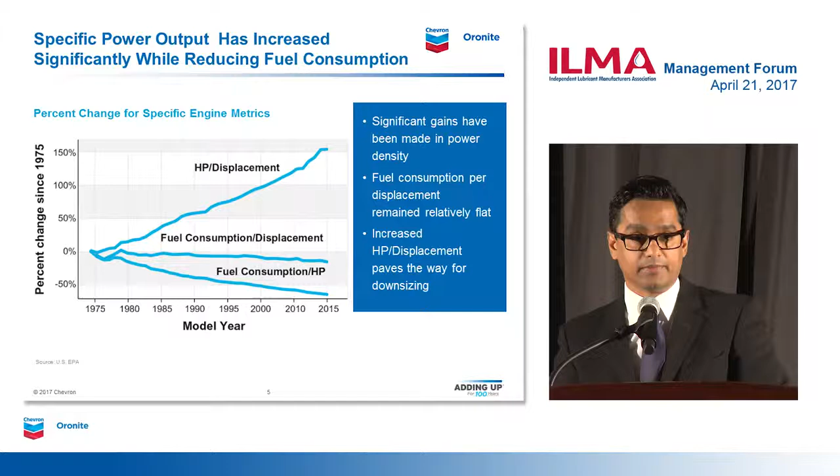There was a significant drop in average engine displacement in the late 1970s through the early 1980s, as we started to move away from a market dominated by large V8 engines. This was a big step towards downsizing, but then the trend stopped for the next 35 years.

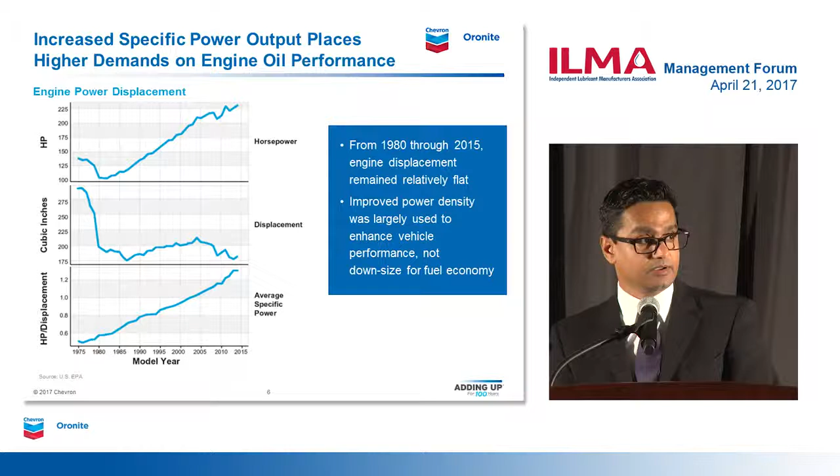Even with advances in power density since 1980, engine displacement remained largely flat through almost 2015, and actually increased some during the mid-2000s. Gains in power per displacement were largely targeted at improving vehicle performance, not necessarily fuel economy. That's not to say OEMs were at fault—it was simply meeting the demands of the marketplace. Today, vehicle manufacturers are starting to leverage the gains in power density by downsizing engines to specifically improve fuel economy.

So if you look at this chart, why the sudden interest in fuel economy? First, fuel economy is directly correlated to carbon dioxide and emissions, which we all know about, called greenhouse gases. Secondly, if you look at the United States, it currently lags other countries in fuel economy.

Fuel taxes are relatively low in the US, which does not encourage consumers to buy more fuel-efficient vehicles. Corporate average fuel economy regulations are now aimed at forcing OEMs to produce more fuel-efficient vehicles, even though the natural market demand may not be there with relatively low prices for the current environment.

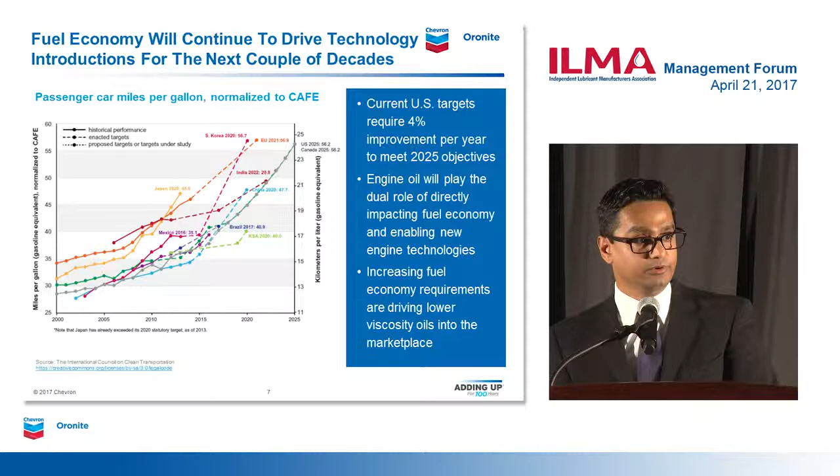So in order to meet these targets, which is 56.2 miles per gallon by 2025, the OEMs needed to improve corporate average fuel economy by 4% per year from now through 2025. The target gets progressively more difficult as the low-hanging fruit is captured and more sophisticated technologies and expensive equipment are adopted. However, I'm sure these numbers will be further reviewed with the current administration taking place.

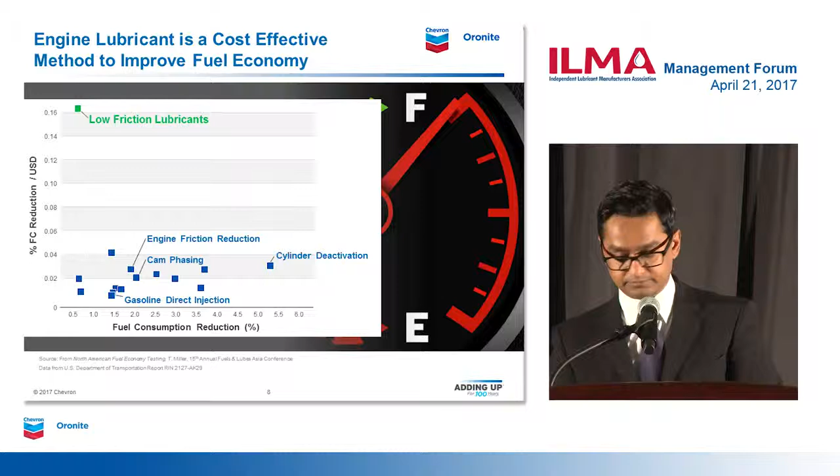So when you look at fuel economy, there are various ways in which fuel economy requirements drive new technologies into the marketplace. One of the first considerations is which conditions should be used to measure fuel economy, and are those conditions really representative of the market? So you have drive cycles, friction reduction, combustion optimization, downsizing, downspeeding. These are some of the examples.

Changes in what I'm calling the operating environment have an impact on the engine technology, which then has an impact on the oil formulations. Some of these relationships are not always obvious or even predicted. LSPI is an example we'll be discussing a little bit.

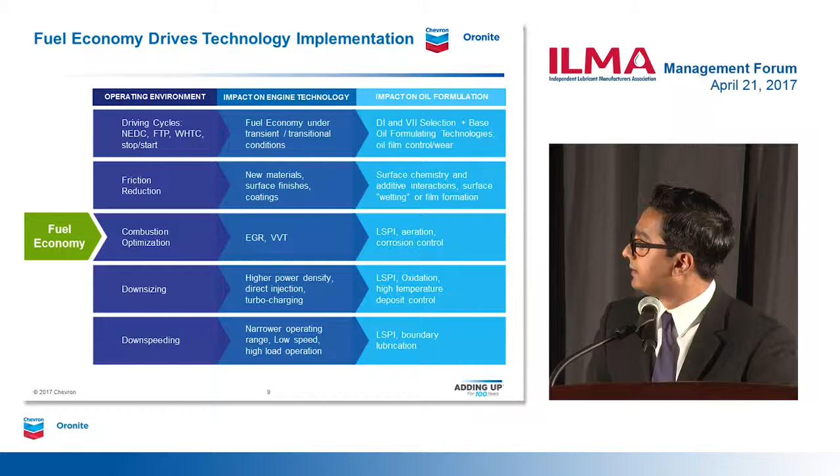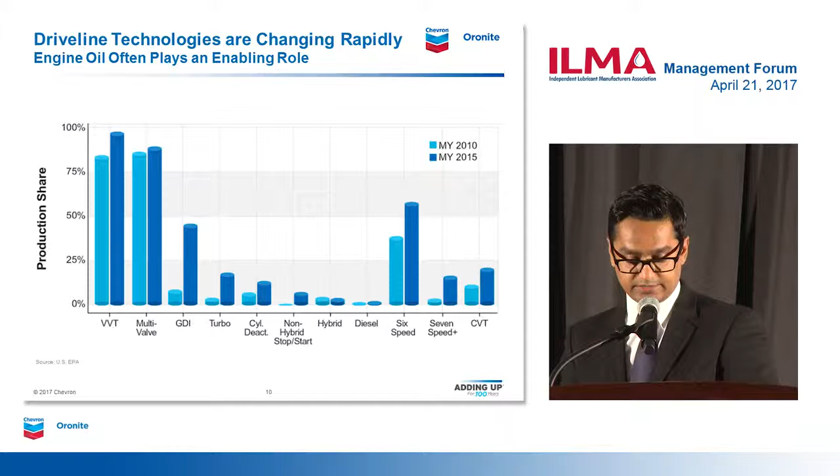So if you now take a look at the penetration of many of these technologies highlighted on the previous chart, we see OEMs are using various means to improve fuel economy. Of course, those with the highest penetration were in many cases the easiest and most cost-effective, what we call low-hanging fruit. Virtually all of these technologies shown have a direct or indirect impact on the engine oil. Changes in the engine oil have been required to enable many of these technologies. Let's now take a closer look at some of them.

Specifically, in order to provide optimal fuel economy performance, many OEMs are offering turbocharged GDI engines coupled with 6, 7, 8, even 9-speed transmissions or even CVT. We see a rapid growth of products incorporating these technologies in the marketplace, and in order to enable some of these technologies, the passenger car motor oil must provide protection against LSPI, which is low-speed pre-ignition, oxidation deposits, soot or particulate matter, which we have never dealt with before on the gasoline side.

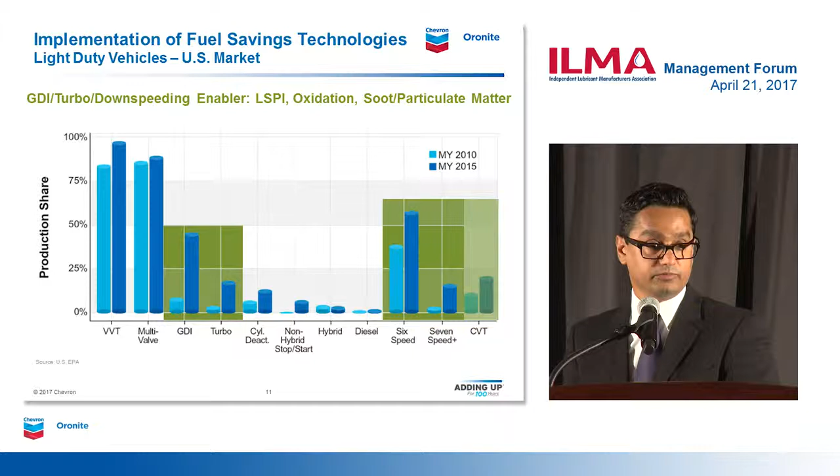So when you look at the combination of GDI and turbo, that allows the engine to generate high levels of power at relatively slow operating speeds. A relatively new phenomenon was discovered when operating turbo GDI engines under these conditions, which is low-speed pre-ignition, or LSPI. And that certainly has some catastrophic impacts if not treated appropriately.

There has been a fair amount of work recently on LSPI, and there are various theories out there regarding the mechanism. In many of the studies, the engine oil composition has been having an impact on LSPI, and an LSPI test is being developed as part of the next categories, including GF-6 and Dexos, to address some of these. In addition, many OEMs around the world are developing their own LSPI test, which is now becoming more of a global phenomenon as this technology penetrates the marketplace.

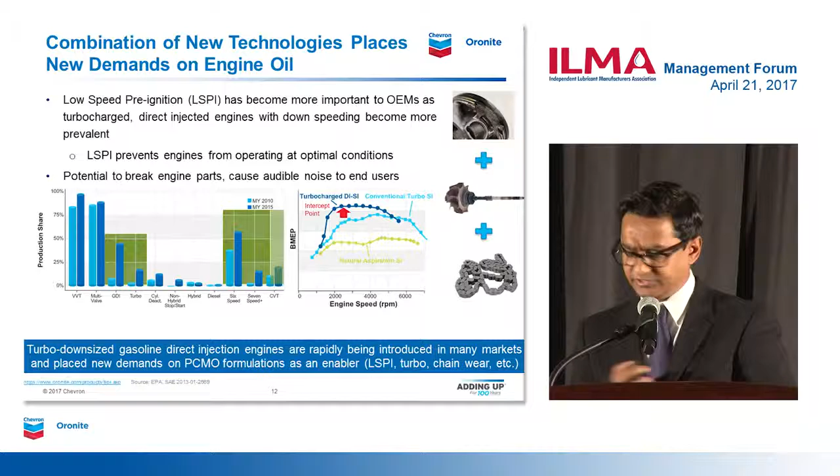So let's take a little bit of a deeper look into the technical aspects of what LSPI is. LSPI results in the formation of a new flame front due to an unknown initiator that leads to knocking, which we all know from a traditional knocking perspective is not good for the engine.

Besides making an audible noise, which is detectable by vehicle operators and will not make them pass through NVH testing, LSPI can result in pressure spikes up to 130 bar. Passenger car gasoline engines are not designed, the metallurgy is not designed to operate at those pressures, and engines will be damaged if we hit them with such high peak pressures.

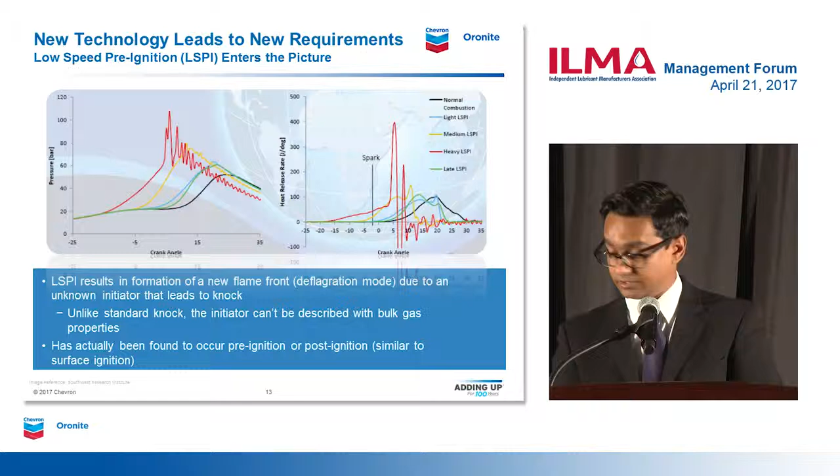What you saw in the previous slide is an image or illustration of a broken piston. So as OEMs make those developments, we are evaluating these aspects of LSPI to fully understand the impact of fuels, impact of lubricants, impact of operating conditions, trying to make sure we can take care of this challenge or performance.

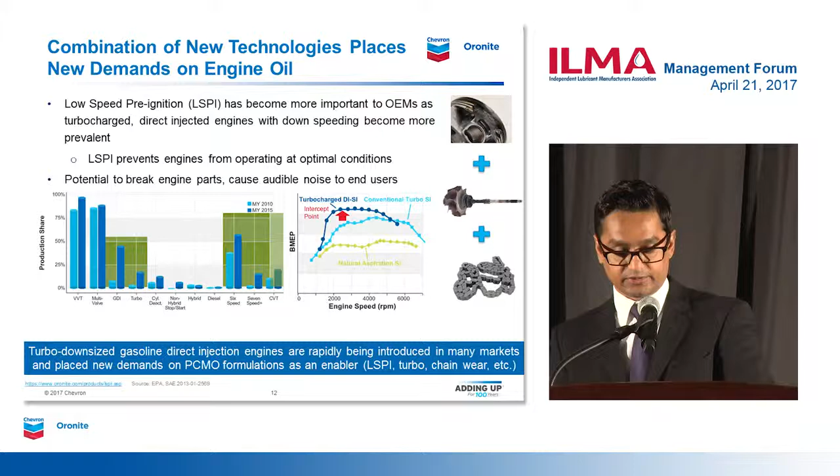As mentioned, various studies have taken place to investigate the impact of fuel, lubricant, hardware, etc. on LSPI. But there are specifically certain lubricant components, as we've heard from multiple literature sources and work that has been done, that are known to promote LSPI, while others can neutralize or actually suppress LSPI. However, many of these compounds are included in engine oil formulations and have been used to deliver the traditional performance of fuel economy, cleanliness, and durability. They can't simply be removed without affecting other areas of performance.

So in order to formulate the future engine oil technologies while addressing LSPI, a rebalance of the chemistries of the compounds is needed to provide the needed performance in all areas, not just LSPI.

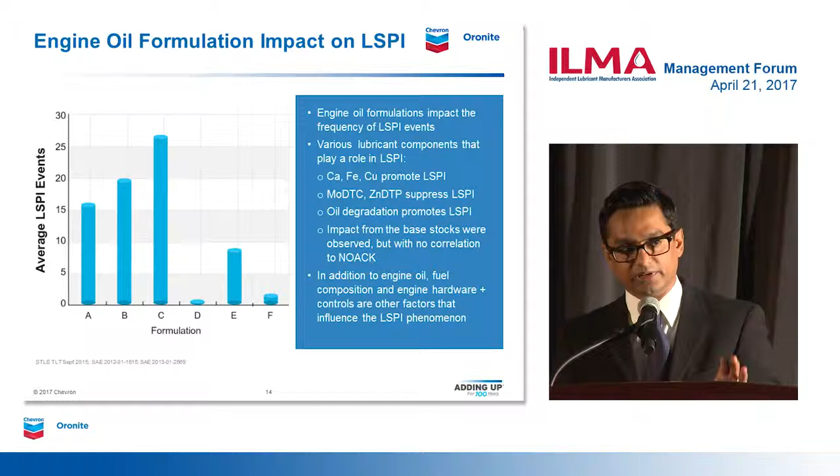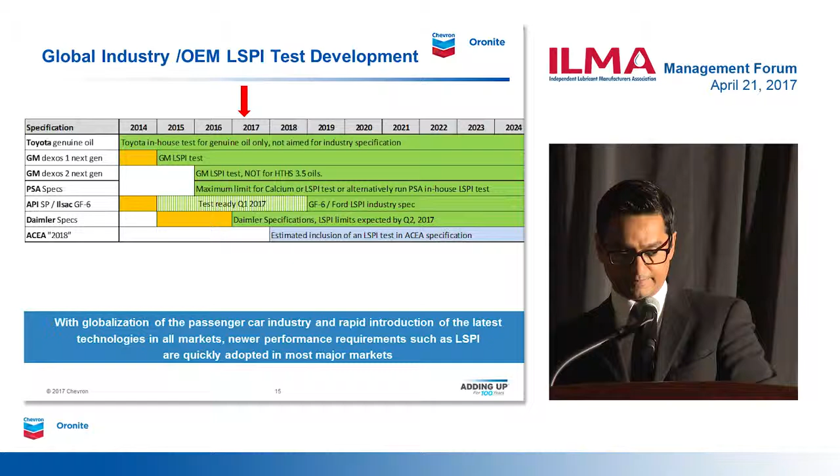Another relatively new phenomena we are seeing with direct injection: passenger car engine oils now need to deal with soot or particulate matter, which is probably the first time we're dealing with this. Soot or particulate matter in the oil has historically been limited to diesel engines, which also inject fuel directly into the combustion chamber. As a result of GDI, passenger car oils now must be able to provide wear control with the soot or particulate matter in the oil.

As a part of the ILSAC GF-6 category, Ford is developing a timing chain wear test with the industry using a 2.0-liter turbocharged GDI engine. The test uses silent chain material and will measure percent chain or timing chain stretch, which is a function of wear between the link pin and the plate.

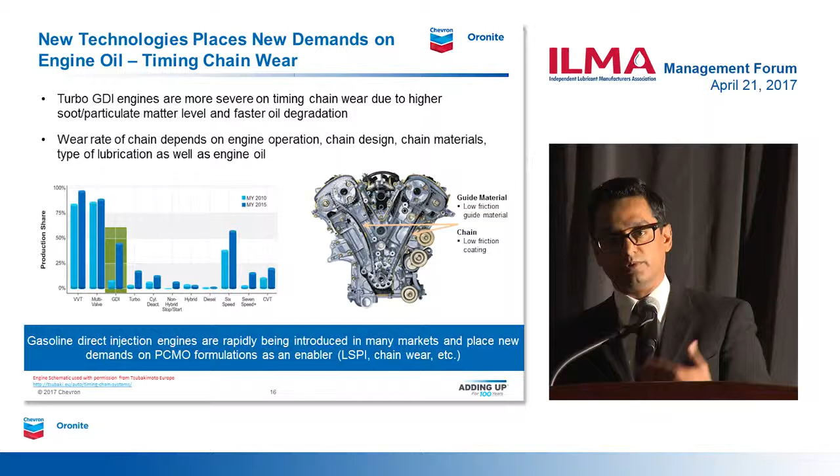There's been a lot of work done in the past five years, a lot of in-house work done by multiple OEMs and multiple folks in the industry. Traditionally, a chain wear test has responded to the materials and the metallurgy. But in this case, it's the first time we're trying to bring in a chain wear test through an engine to measure oil performance.

So with this in mind, with the trends and the drivers and the hardware that is in the marketplace, how do we address it? How do we bring it to this industry? How do we develop a specification and then cater to the performance needs? Specifically for today, we'll focus on GF-6 and Dexos because those are the two big volume key specifications that are hitting the marketplace pretty soon.

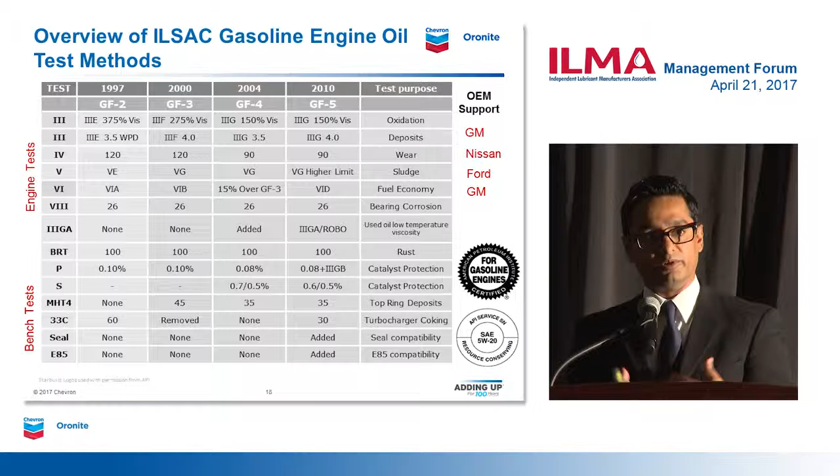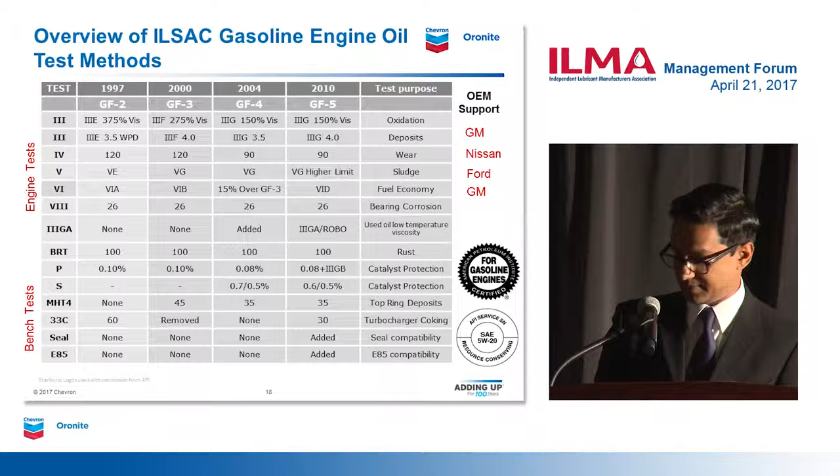There's a lot of things that happen in these couple of lines I just said. There's a lot of industry bodies, a lot of partnership that happens, coming together to develop a spec that would take care of the OEM's needs or the hardware needs. So going forward, can we use the same infrastructure to address the next set of challenges, which is coming up with GF-6?

So what to expect? Fuel economy and oil robustness are always the key drivers, either directly or indirectly. In this case, fuel economy will be the key driver for moving to GF-6. Measured fuel economy benefit will be through updates to the new tests, Sequence 6E and Sequence 6F, which will include fresh and used oil requirements. GF-6 oils will certainly have an indirect impact to fuel economy by minimizing LSPI, allowing for an indirect fuel economy benefit through the introduction of GF-6 technology.

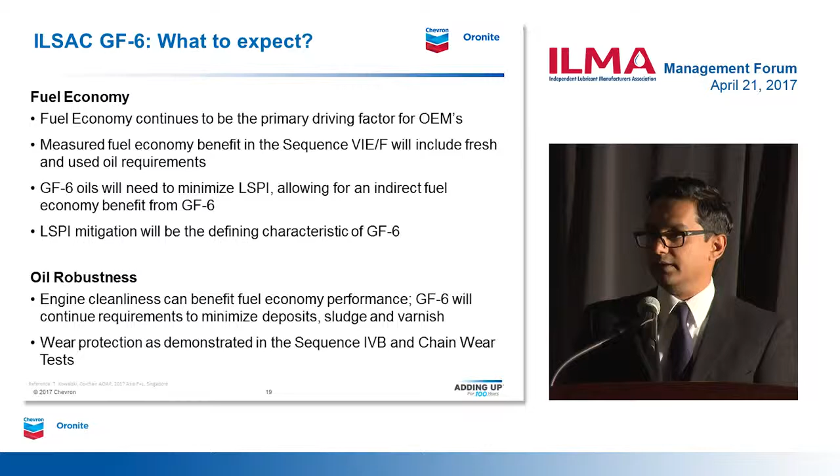At the same time, durability by providing some form of LSPI mitigation will be the primary defining characteristic of GF-6. So it's kind of the gateway to GF-6. And after you are in there, it's basically the traditional performance, that is oil robustness, the cleanliness, the hardware protection, and sludge performance.

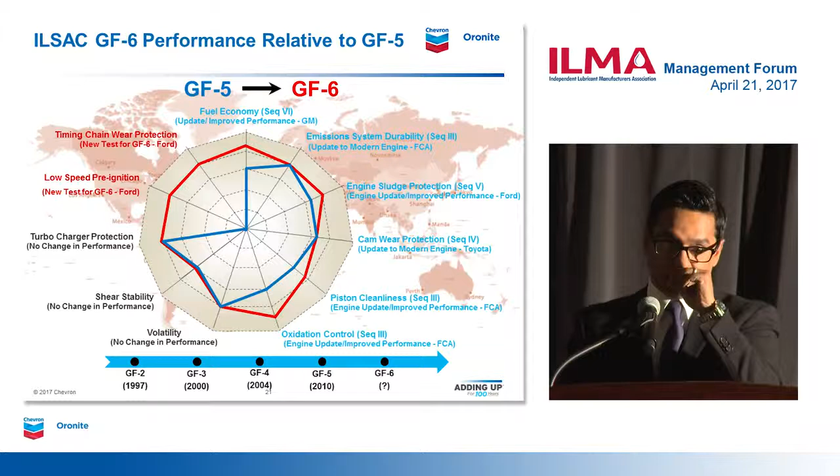So here's a quick snapshot of the high-level qualitative comparison of GF-5 performance to GF-6. What you see on the slide is a quick illustration of the GF-5 performance. And when I look at GF-6, what I want to illustrate here is probably in the history of passenger car motor oil development, the amount of work going on in bringing GF-6 online is tremendous.

If you look at the blue performance parameters, which is a traditional performance parameter getting updated by hardware, whether it's fuel economy, engine sludge protection, cam wear protection, or piston cleanliness and oxidation control, every single test is getting upgraded with new hardware, either from the same OEM or a different OEM.

At the same time, there are two brand new OEMs coming and contributing to this development, which is Chrysler and Toyota. At the same time, we're also bringing in two new tests, timing chain wear protection and low-speed pre-ignition, which has never been there before. So if you count pretty much the number of tests that the industry is bringing online with GF-6, it almost accounts to seven.

I don't think in the past, to my recollection, and I haven't been there for all of these developments, any of these GF updates have gone through that kind of development. So I just wanted to level set the amount of work the industry is going through in bringing some of these specifications online to update the hardware needs.

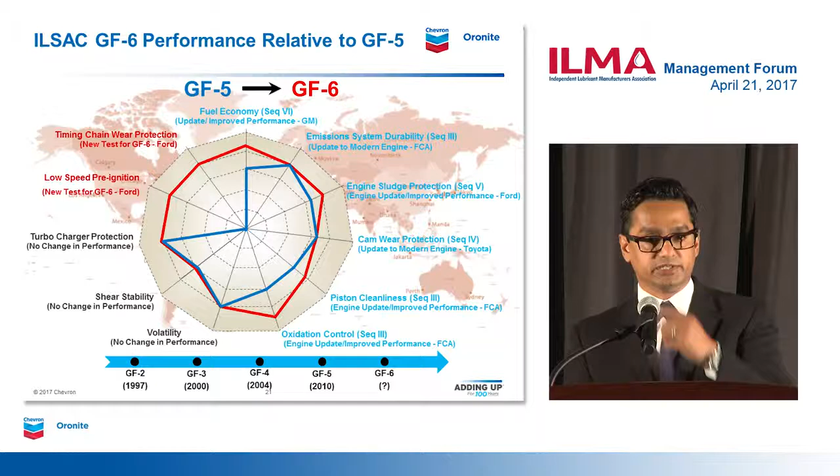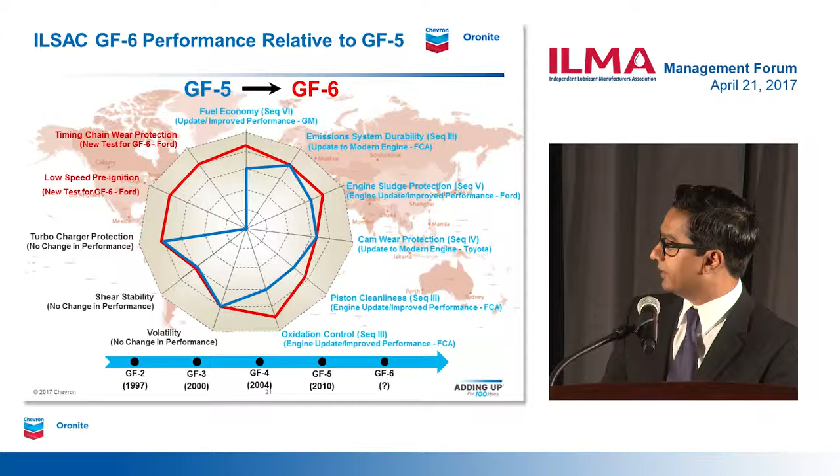And plus, what you see here is the global nature, the global footprint, with requirements not only in Americas, but now there is an emerging requirement at the same time in Asia, which is adopting these GF-6 categories at the same time and implementing it at the same time as in Americas. So there is a lot of challenge in front of us that the industry is coming together to develop.

So where are we? What is the road to GF-6? Here we are today, engine test development. I'm sure you have read a lot of articles and literature, and been exposed to a lot of dates from an API first license date perspective, and I always come to, even within my own management, they ask, when is GF-6? As a matter of fact, last year, we collectively as a team in AOAP decided not to throw out a first license date, because unless we complete and get some ground running on the engine test development, it doesn't make sense for us to project something, because it gives a false notion of delays.

I think what people need to understand is the amount of work that is going on in bringing some of these categories online. So engine test development is where we stand. This is probably the simplest picture of GF-6 development, and I'll show you the more complicated one next. But we are coming to an end of engine test development. The light is probably coming, we can see the light at the end of the tunnel. But even after that, there's a lot more work that needs to be done.

BOI VGRA is another big piece of it, because when you bring in seven new tests, you bring in a lot of BOI VGRA development work. I know some of our folks here are pretty involved in some of this development, and this will take, we don't know how long, but it will take a lot of time to develop the BOI VGRA rules as we develop the products.

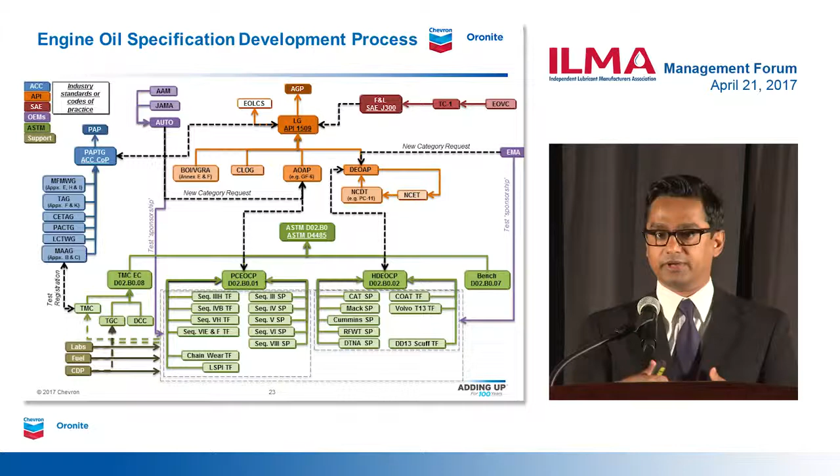Let's look at how the Americas market is breaking up. The Americas market is now breaking into Dexos. Dexos is now into generation 2. When we were in generation 1 and GF-5, they kind of overlapped at the same time. In the case of generation 2 and GF-6, now there is a gap. So generation 2 is right in front of us, but GF-6 is a couple of years from now.

The implementation is not lagging, it's a global implementation. So their expectations to launch some of these products are at the same time, and the changes are at the same time. So, a quick reminder: Dexos 1 first generation licenses are scheduled to expire on August 31st, 2017, which is right in a couple of months. I'm sure there's a lot of dialogue going on in the industry about how to address that and how the products need to be updated.

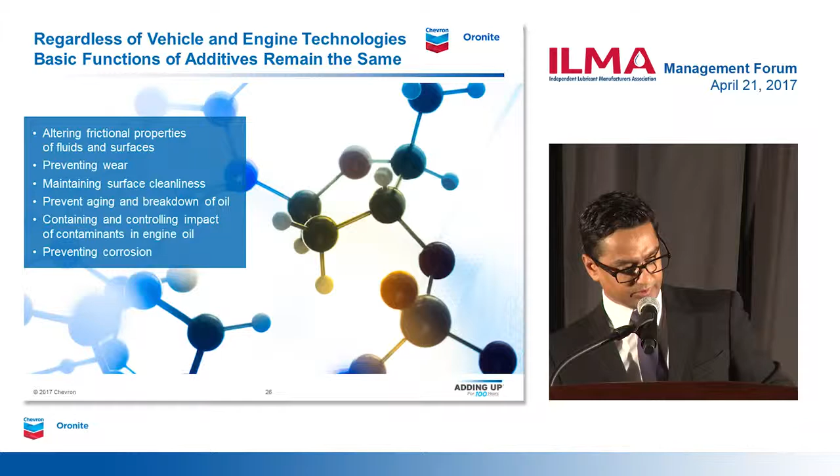Let's step back and look at the hardware. We're all a bunch of engineers, chemists, and scientists coming together to develop technology. One of the first things we look at is trying to break down the problem and simplify it. One aspect to always keep in mind is that regardless of what the vehicle engine hardware is, let's boil it down to a system, or technologies we need to develop to address that system or operational environment, and how the basic function of oil additives is impacted, because that's where we need to focus, since we need to know what chemistries we need to develop for the future.

This is a very fundamental, simplistic way to help us develop products or technologies. But eventually I always come down to this holy grail of engine oil development: the classic balance of fuel economy and durability. That's the classic balance, and it's not going away. It's just coming in different shapes and forms, but that's the classic balance we always have to take care of.

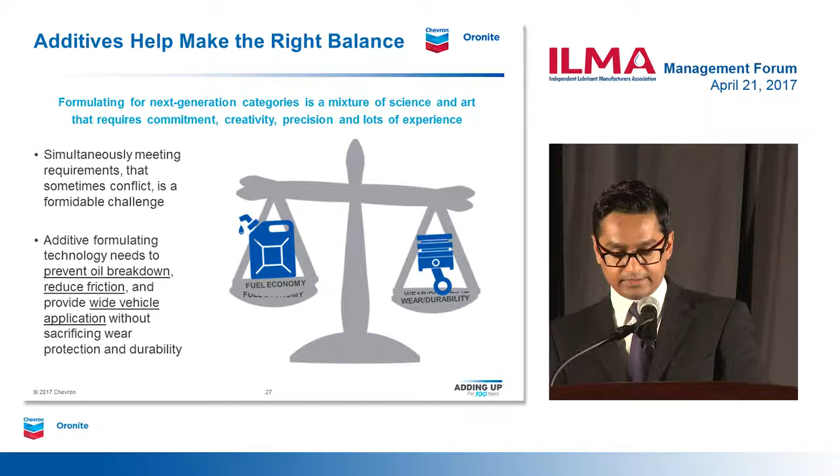There are many ways an engine oil could be formulated to improve fuel economy if that's the only concern. However, as we'll discuss a little later, fuel economy is just one piece of the puzzle. Additives have to help find the right balance. The formulating technologies need to provide wear and friction reduction, universal oil capability without sacrificing wear protection and durability, while simultaneously meeting some of the future challenges and being able to connect to those.

We have all done puzzles. My 4-year-old gets better at solving puzzles as she grows up. But I think the biggest challenge for us is taking care of these smaller systems and then fitting them into the bigger puzzle. And that's a big piece of it.

So when I say a smaller system, right now the system in front of us is the turbocharged GDI engine. The performance areas we have to address are turbo protection, low-speed pre-ignition, and chain wear, to name a few. However, when we solve this puzzle, it has to fit into the traditional puzzle, which takes care of fuel economy, wear, and sludge. And then we also have to be ready for the future, because sometimes we want that flexibility on the platform.

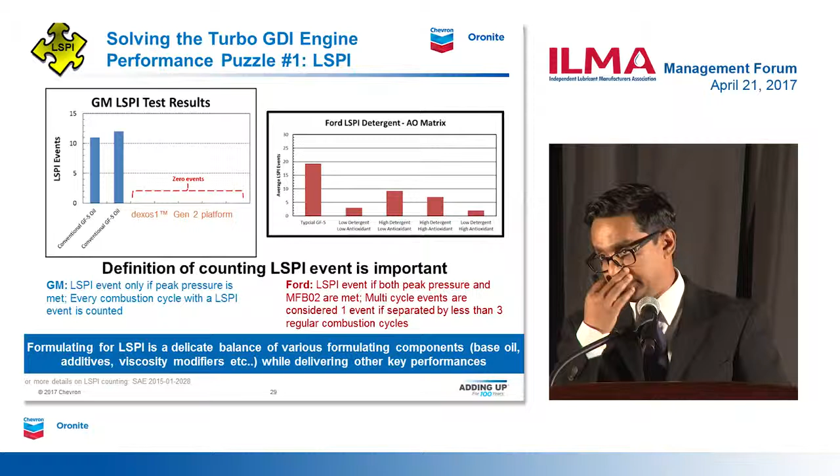So how are we doing that? LSPI is the first one. What you see on this slide are 2 different tests, 2 different chemistries, trying to understand and simulate how to handle multiple different LSPI tests. Because as I showed in the earlier slides, there are multiple OEMs coming up either with their own tests or developing them as part of the specification. But sometimes, from a simplistic view, to reduce complexity, we want to minimize and understand the fundamentals. So what you see here on the left-hand side is a GM LSPI test.

If you put a conventional GF-5 oil, you see high LSPI events, which is not acceptable. When you look at a Dexos 1 Gen 2 type platform, this is the requirement. You have to meet the GM Dexos 1 Gen 2 limits, which requires you to have at least 3 zeros in the test, and also a maximum peak pressure of 2 events, not more than that.

However, what we are trying to illustrate here is as we move into the Ford engine, these same oils could actually behave a little bit differently. Here is a small snapshot of a matrix of a detergent and an antioxidant, just to show what are the drivers for us to formulate around.

But the key part to these two tests is the definition of the counting of LSPI events, which is extremely important because when we develop specification after the technology, it is extremely important to know how the limits will be drawn. And so when you're looking at a GM test, you might see all zeros, and you might see some events here, but that doesn't mean that they are looking at the same thing.

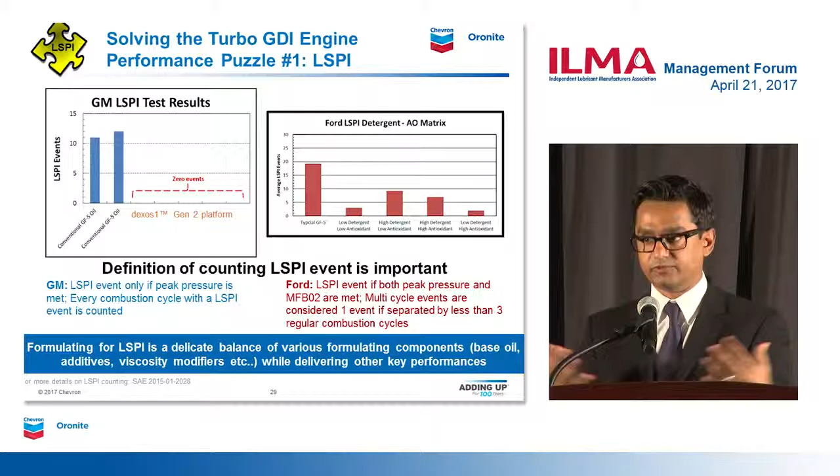So those are the things that the OEMs need to understand, that they cannot have, that the industry cannot develop single products for every single engine or LSPI test. It has to fit in. So we wrote a paper just to explain that process of how we need to understand the mechanism of counting as we go into the limit setting process.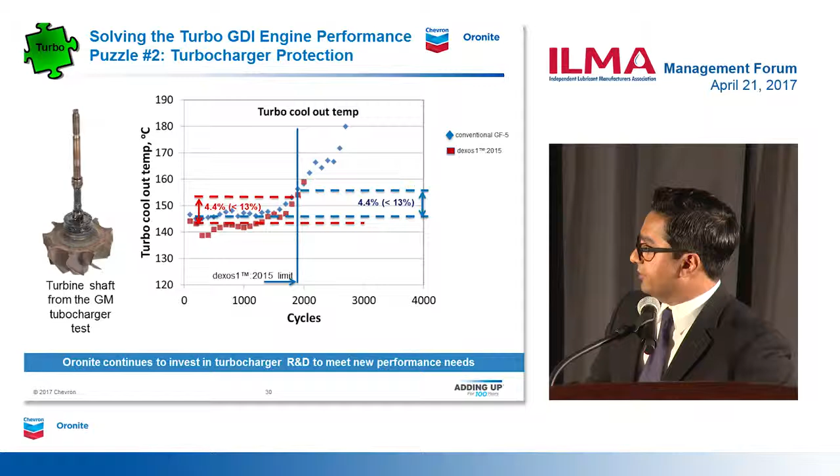So eventually, what this test is looking at is the antioxidancy performance or the oxidation strength of the oil. So you have to take care of the LSPI and make sure once you reformulate the product to address LSPI, you can deliver the antioxidancy performance to take care of turbocharger protection. And these are the limits: less than 13% for the Dexos 1 Gen 2 approval.

And finally, in the turbocharged GDI engine equation, you have the chain wear. Although the test has completed the precision matrix, there is still some work going on, post-precision matrix, to fine-tune the test. But what you see here is the cross-section of what exactly we're measuring. We're trying to measure the wear between the pin and the plate.

However, it's extremely complex to put down a fundamental tribological system in place to measure this wear and develop a specification. So indirectly, what we are measuring is a timing chain stretch, which is a function of the wear that we see in this contact.

And what you see here are two reference oils that are being used in the industry. One is the high reference oil, and another one is the low reference oil. The idea here is, again, once you formulate to achieve a certain number, which is low reference oil, for example, if I take this one as a passing or a good oil going forward in GF-6, you have to make sure whatever changes you make to this chemistry, you are now able to address all of the other GF-6 tests accordingly. And there's been a lot of work, as I said, done in this area.

There's a lot of papers around understanding the soot size, the differences in the soot particles between diesel and gasoline. Traditionally, this test, as I said, has always responded to metallurgy differences. You put a coating here, you can drop the numbers. There hasn't been a test where it can statistically separate oils, and this probably would be the first one.

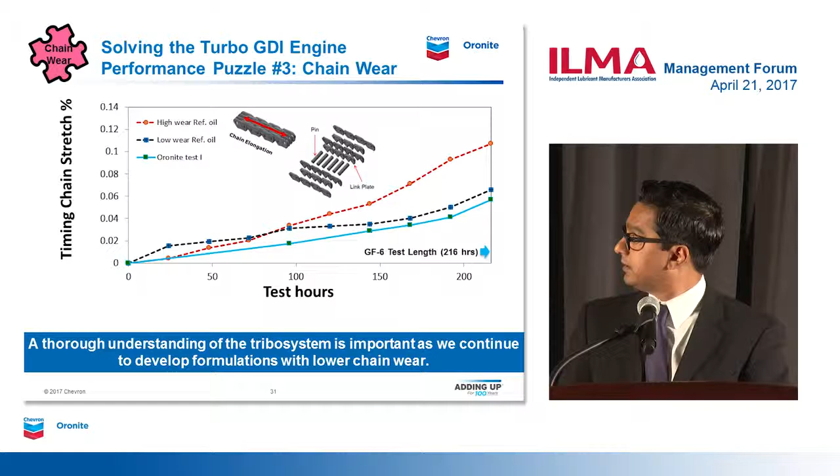So to sum it up, how are we going to deliver this performance? As I said, the traditional areas is enabling fuel economy directly, indirectly through viscosity changes, through additives, friction modifiers, low friction lubricants, enabling hardware indirectly like LSPI. But after that, it comes down to engine protection, delivering engine cleanliness and durability.

However, after performance, we got to make sure that we address the supply chain aspect of it. We have to make sure that the product is available globally. And I guess a lot of folks are interested - at the end of the day, it has to be cost effective. It has to meet the market economics, right? So that's another piece of the puzzle that we'll have to address.

Plus, as I said, products are becoming more global, and that needs to be addressed. So the complexity is not just limited to the technical development, it also is part of how to bring a product to the marketplace. So technical products and the marketplace is extremely important to keep in mind as you take a holistic view of the development process.

So here are some performance profiles, just to give you a summary of the performance profiles of products that we probably need to think of as we address the turbo GDI performance. So here we are with GF-5. I've just listed out the key performance areas. We're all familiar with it.

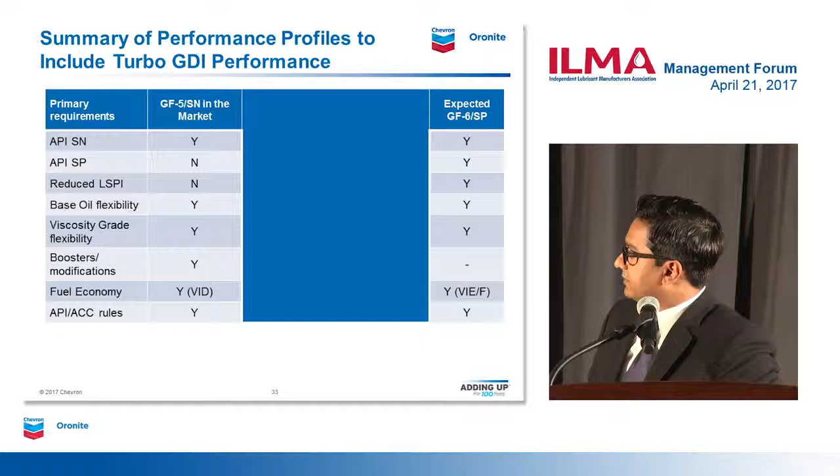This is what the expected GF-6, and these are conventional products. But again, how do we jump there? We're not yet here, we're getting there. Dexos 1 came in, so we are addressing LSPI capability there, reduced LSPI.

As you have seen, GM Dexos is very limited in terms of the flexibility around BOI VGRA. So there is a limited set of products in the marketplace. There is a lot of work that is going on with GM and the industry to bring products. There's a limited viscosity profile that they're looking for because a lot of these engines are looking at 5W-30, 0W-20. There is a 5W-20, and there is a little bit of 0W-30, and they've also introduced 0W-16, although they have explicitly said in a lot of their presentations that none of their engines right now uses 0W-16. But again, I think the concept that they use is future-proofing the specification if there is a need in the future.

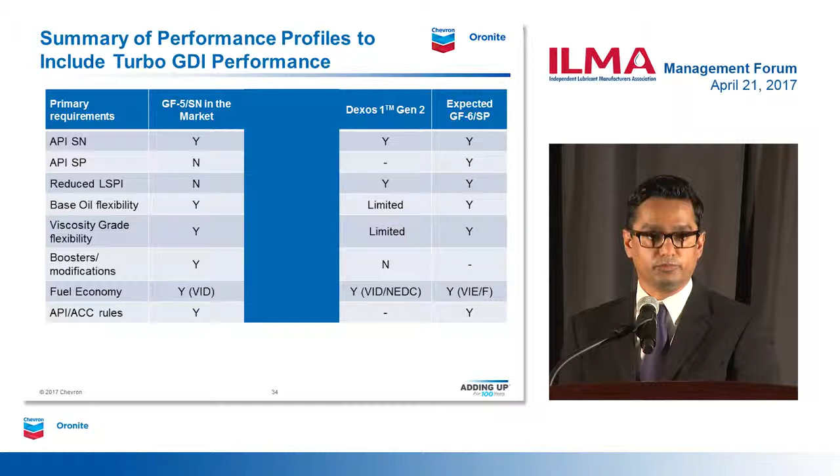And then, as I said, a turbo GDI - I mean, Dexos is for GM, but when you look at the gamut of turbo GDI engines, not just in the Americas, but globally, there is a lot of engines that are coming out in the marketplace with turbo GDI technology. And there is an increasing need for a product that could be developed to meet the turbo GDI platform. And we see that market here, and that's why we kind of provided a quick snapshot of what that product profile could look like.

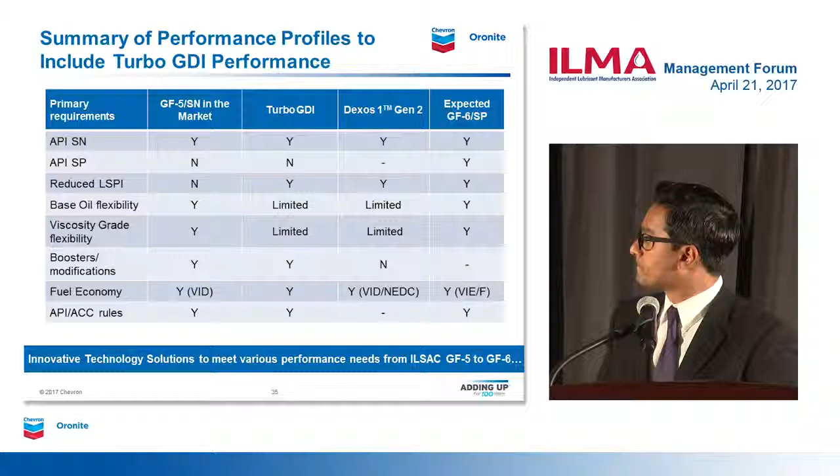Then finally, you always have to stay connected to the real-world feedback. Nothing is perfect unless we hear it from the field. So what we do is, traditionally, like all of us in the industry, we throw products in the field. In this case, it's a quick snapshot of some data set or some oils that have been thrown in vehicles with turbo GDI engines - two specific oils.

One is the conventional GF-5, and another one is turbo GDI product platform. Just to understand, is there any performance difference compared to the GF-5 from a no-harm perspective? And what we're looking for in this type of no-harm situation is to make sure that with all of these chemistry changes that we're making, is it in line with the GF-5 technology in terms of giving, or is it better, or is it worse, just to help us feed in that information as we develop the products.

So here's a quick snapshot of the viscosity, TAN, TBN performance, and we are comparing the GF-5 technologies to this turbo GDI platform. And pretty much, if you look at it from a field performance standpoint, very similar, pretty much I would say overlapping the GF-5 technology. So it gives a lot of satisfaction for us to understand that all the modifications that we have made addresses or meets the field requirements that are traditionally put in place.

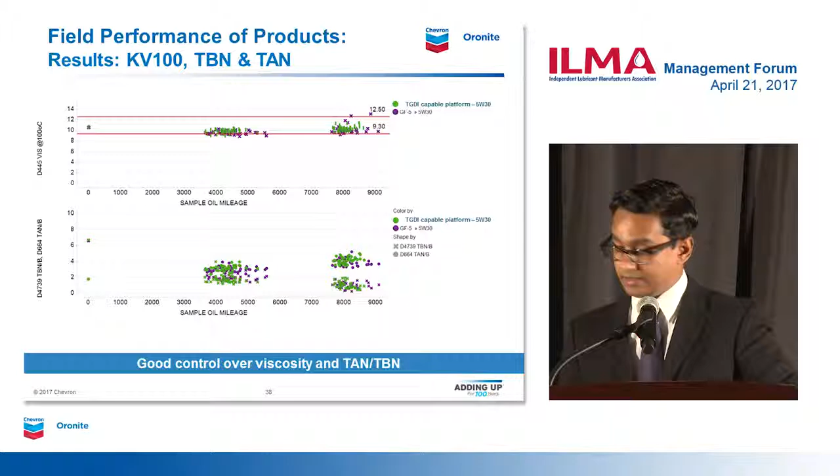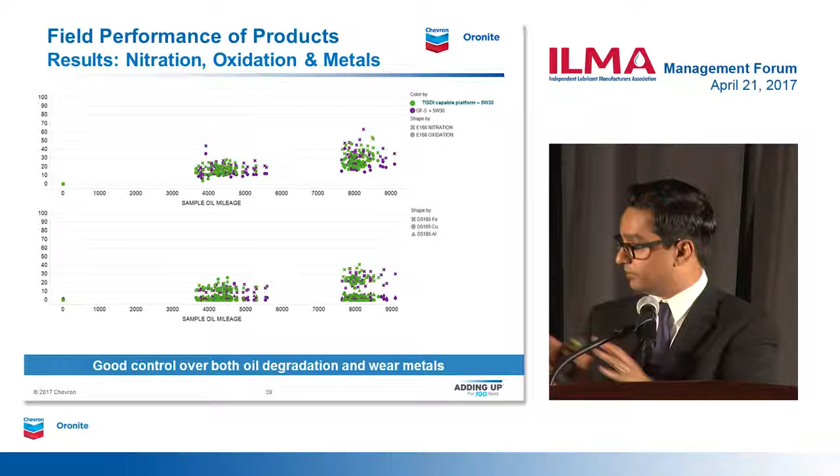Looking at nitration and oxidation and metals, again, very similar performance compared to GF-5. So protection-wise, there is that same protection that we are providing just from a bare used oil analysis. However, this is a very small snapshot.

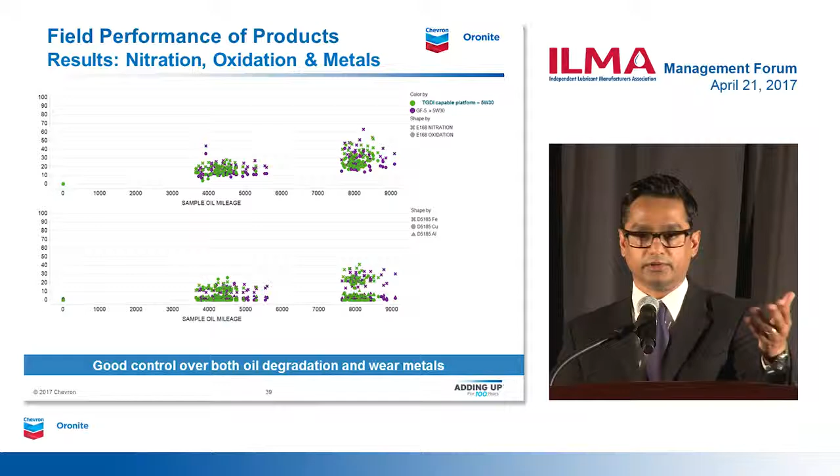There's a lot of work the industry is doing along with ourselves in trying to understand what these engines look like, the parts look like, and trying to fine-tune the technologies as we progress into the GF-6 and the next generation of oils. The other key part we also do is get some real-time feedback to help some of the industry folks, and even from an education standpoint, to get a sense check of what the market is looking for, what the consumers, installers are looking at from some of these specifications.

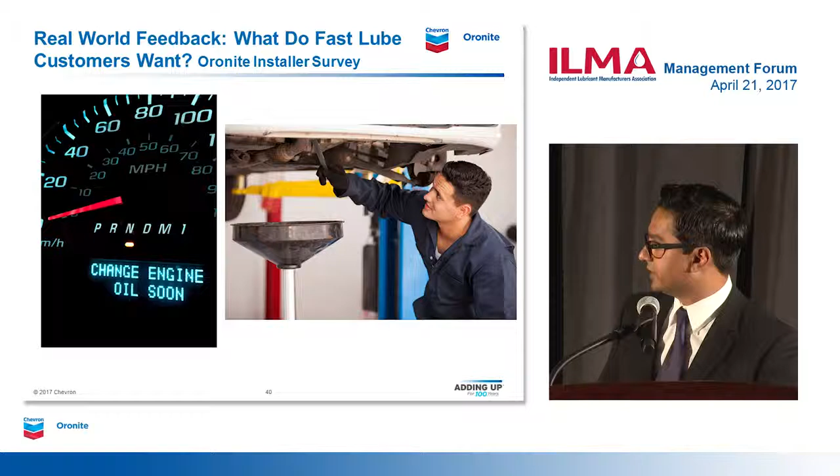These are all the traditional performance areas that we talk about, so just making sure that the products developed are meeting some of these consumer or installer needs. Durability, long drain, and fuel economy are still the most important features.

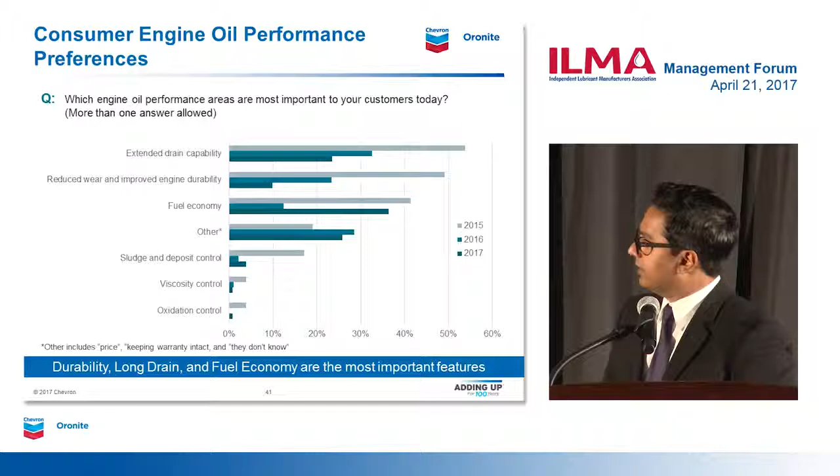Most of them ask the installer. Now DIY, or DIFM, do it for me, is becoming more prevalent than DIY. So people are leaning more towards installers to make the final judgment on what products to use. And finally, the installer is playing a critical part in this process, and playing a major role in the engine oil selection for the end consumer.

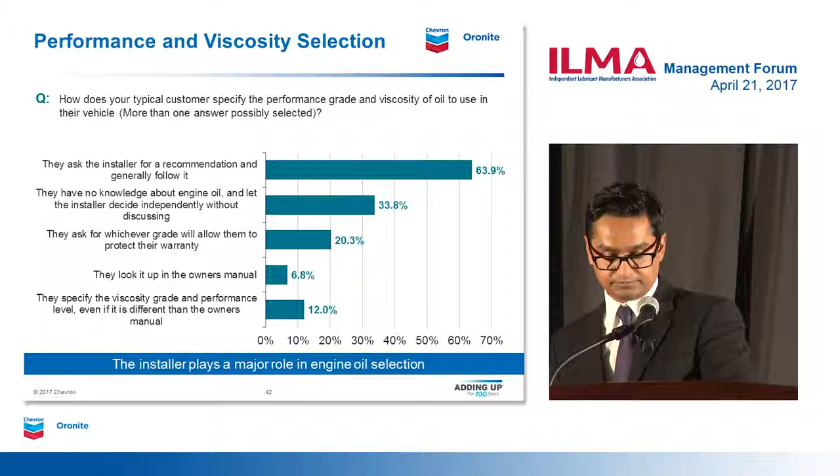So finally, to wrap up this section, I hope I was able to give you a holistic view of this entire process: how we look at the future, what is important, what are the drivers, how engine oil comes into that equation, how we look at technical development and bring it into a specification process, and then take that specification process, develop products that meet the market needs, and eventually deploy it in a sustainable format and make it as future-proof as possible, because the future is not that far.

Probably I've seen presentations where people have already started projecting GF-7. And I scratched my head and said, I'm sitting here in GF-6 and people are already thinking about—I'm not even thinking beyond engine test development completion and people are already projecting GF-7. But that's a reality. OEMs, once they're done with test development, are looking at the next set of hardware.

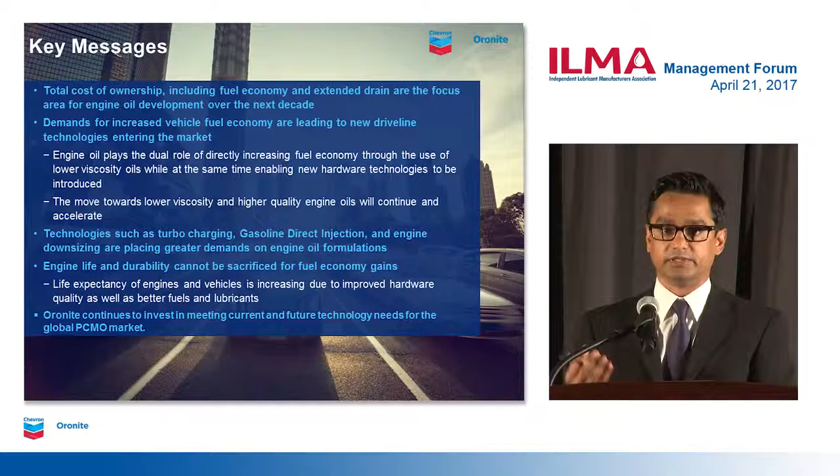So overall, as I said, we are continuously investing in meeting the current and future technology needs, as our partners, our friends, as the industry is, to make sure that consumers are updated and they get the latest, best products in the marketplace to meet the global PCMO market.